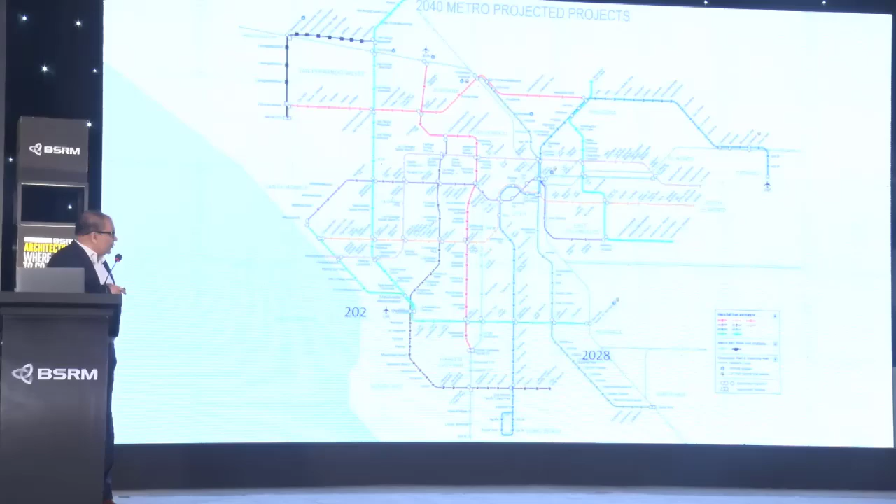Today, the transit network in LA is much smaller. It looks something like this. But over the next 20 years or so, it's going to expand to something like this, what you see here, 2040. And our work has actually involved 2 of these lines.

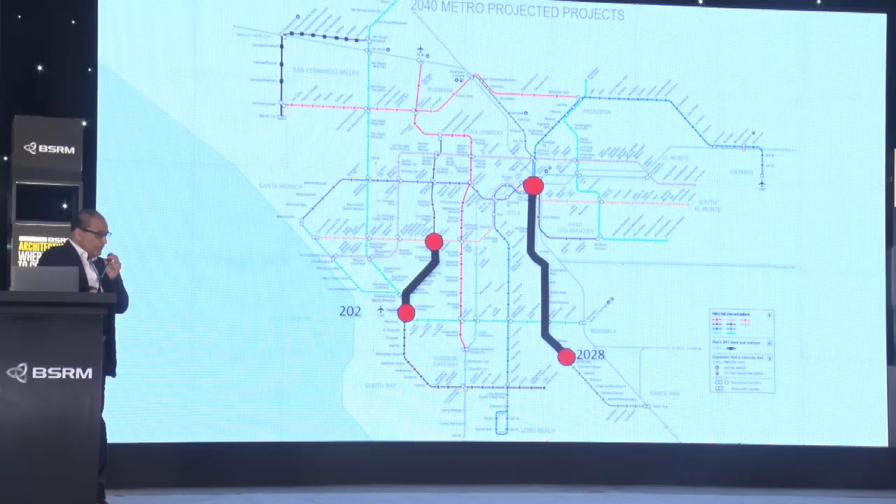One is called the Crenshaw line, which has now been implemented. In fact, the last station is opening next week. And then another line, which is still not being built, but will be built by the year 2028. It is called the West Santa Ana branch.

I would like to talk about these in the context of what I think of as being city design. I think of city design as being a choreography of incremental site-specific urban interventions, which is designed to restructure the immediate vicinity of those interventions, very much like Rafiq did in Old Dhaka with that park, which has had this incredible impact throughout the community and so on.

And so City Design Studio was formed. We are now in our 15th year, focused on making these urban interventions, not only in LA, but in different parts of the world. We think of city design as transforming communities, but transforming communities together with the community.

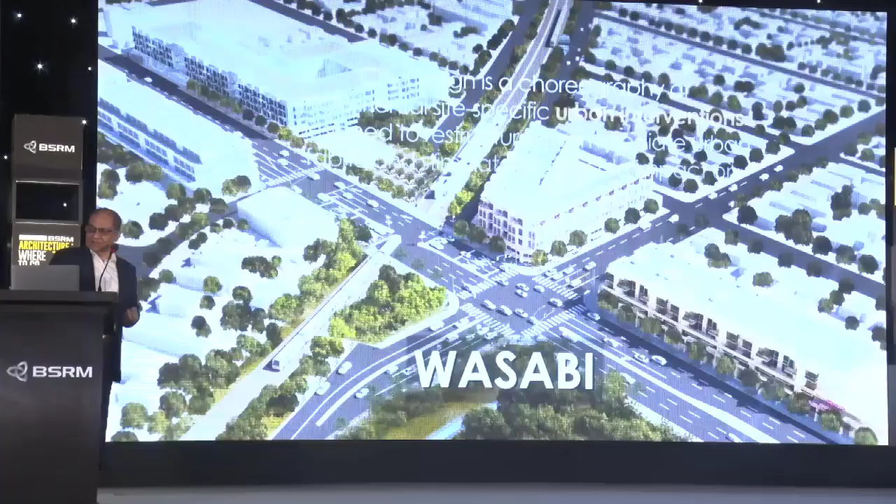So I'll begin by talking about the West Santa Ana branch transit corridor, transit-oriented development, strategic implementation plan, which nobody wanted to say. We instead started calling it Wasabi, which everyone can say.

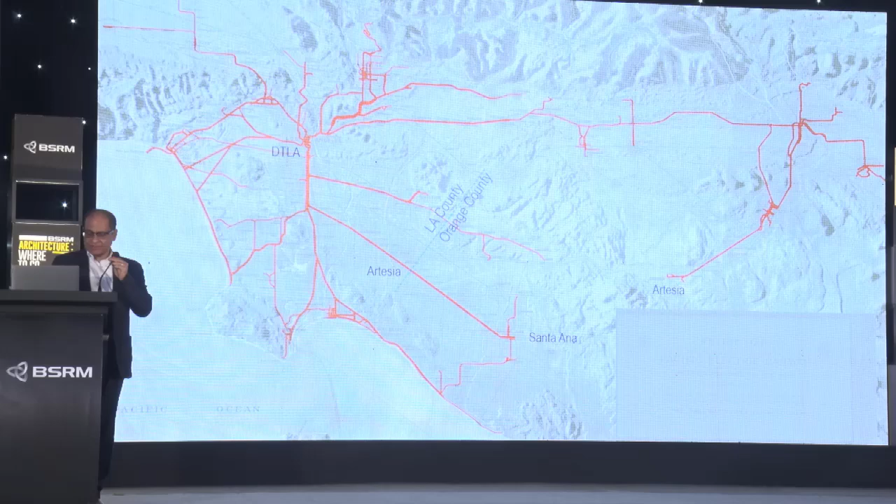And what Wasabi did—this is the red line network, a simplified version of it—which began in downtown Los Angeles at the top and went all the way down to Artesia at the bottom. In fact, it went all the way to Santa Ana.

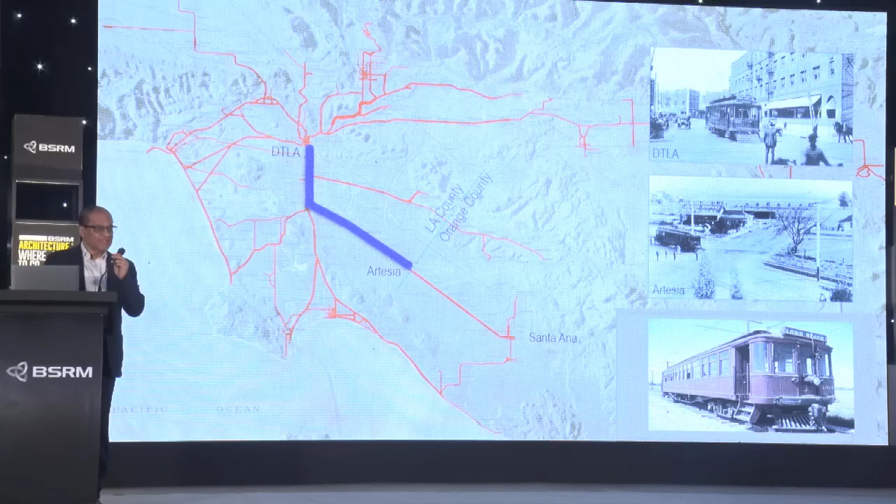Our client was the Federal Transit Administration, and they funded the preparation of joint development studies and transit-oriented development plans for 12 stations along the purple segment of the line, the West Santa Ana line, the Wasabi line.

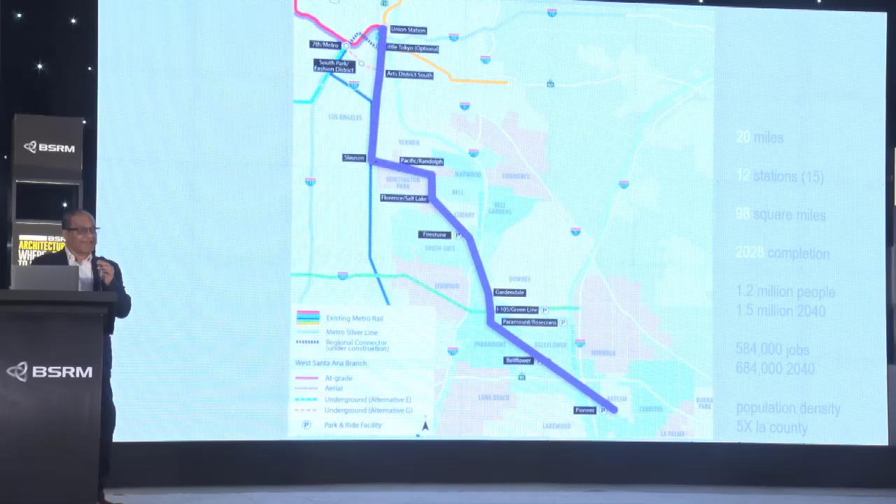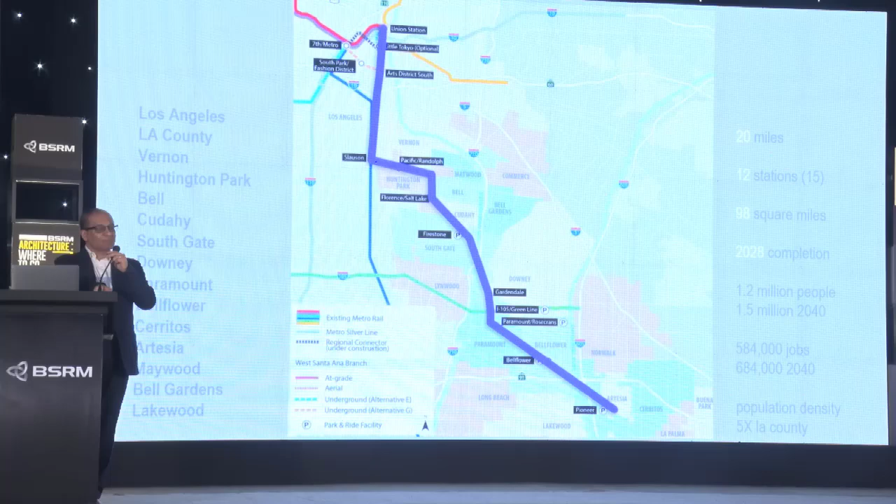Our work involved 20 miles of transit corridor, 12 stations, a 98 square mile impact area. We went through 15 different jurisdictions from Los Angeles all the way down to Lakewood. You see the city of Downey in the middle—Downey is where Karen and Richard Carpenter grew up and sang those incredible songs you all know.

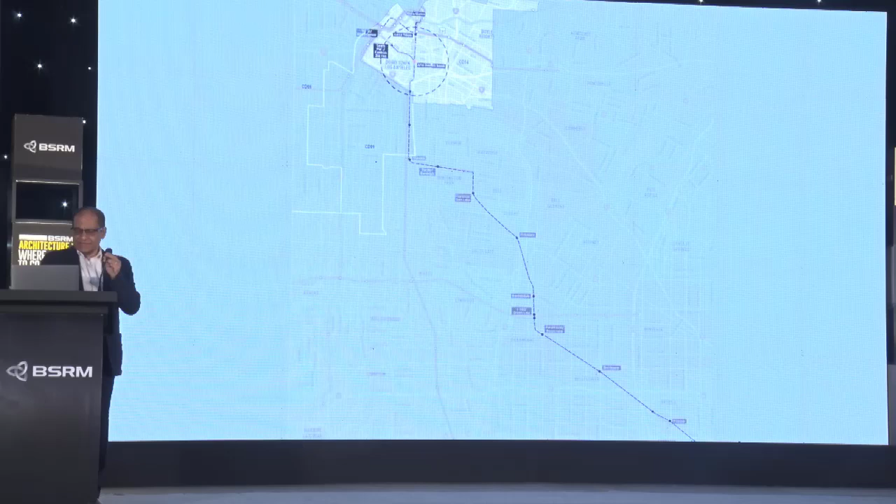And we prepared 12 of these station area plans, or transit-oriented development plans. Our project was one of 28 projects to be completed by 2028, part of an agreement between Los Angeles County and the City of Los Angeles in preparation for the Olympics.

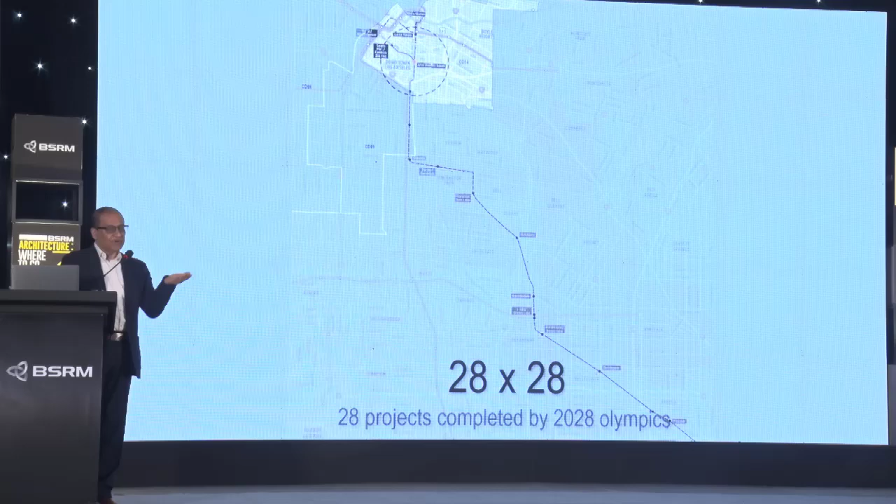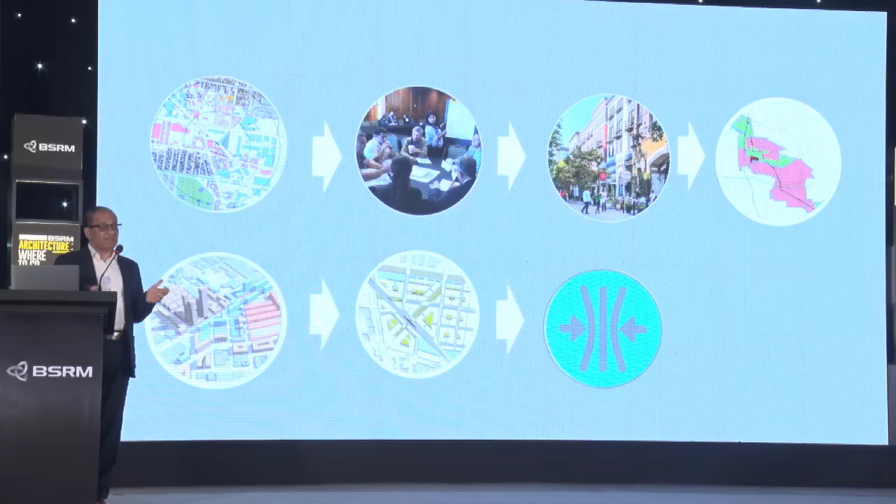So the way we began the plans was by first looking at existing planning studies, speaking with the community and learning from them, preparing a vision based on what the community wanted, looking at the economic viability of those plans, having a concept, preparing the actual plan, and then development strategies and a toolkit.

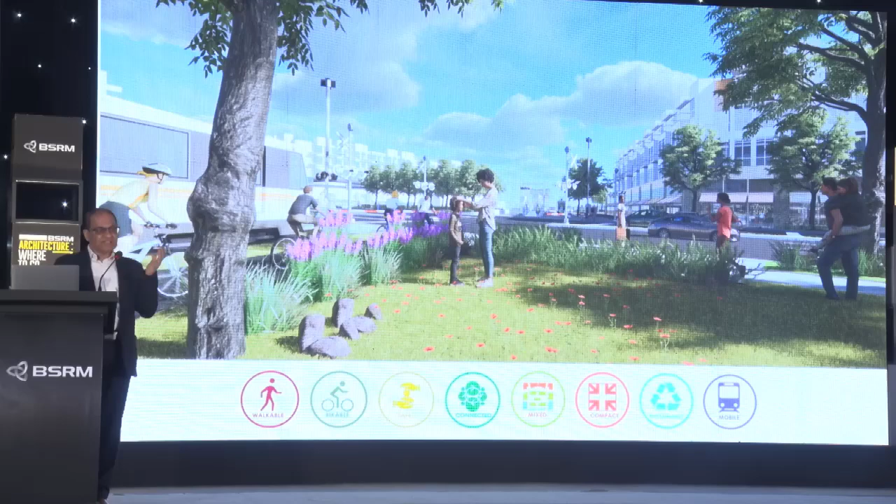All of this was based on a vision prepared in conjunction with the community. I won't go into all the details, but we synthesized them into 8 principles: walkable, bikeable, safe, connected, dense, mixed use, compact, and integrating transit.

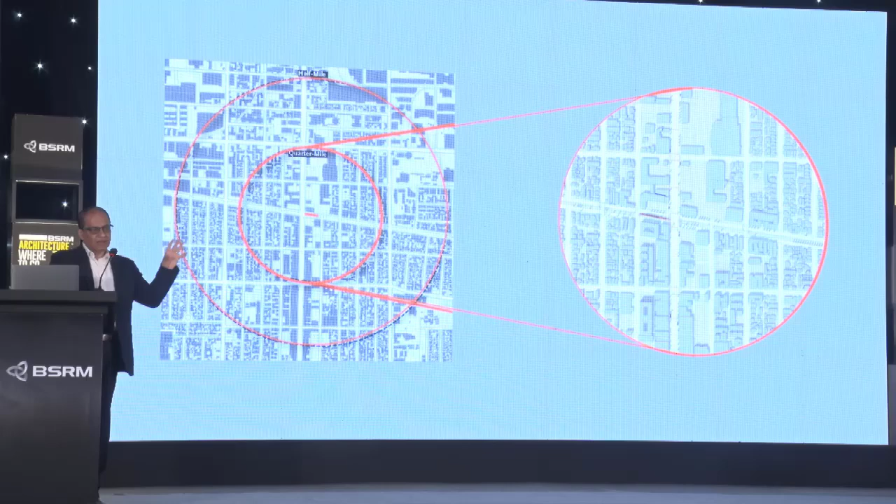Essentially what we did was look at a half-mile radius on the outside and a quarter-mile radius on the inside. The half-mile radius is about 502 acres, so we studied those 502 acres and then came up with a plan for the smaller quarter-mile section.

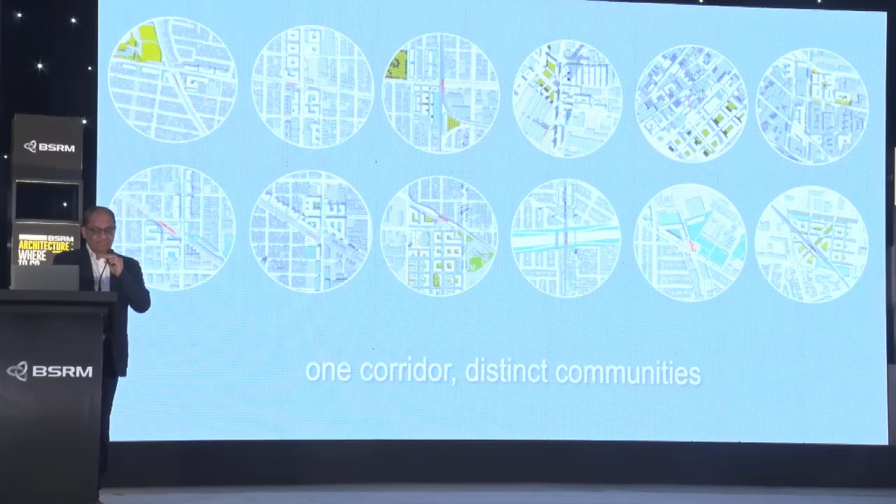The idea, of course, was not to prepare the same plan for every community. Every community is distinct—so it's one corridor that works as an economic unity, but with distinct communities. So 12 plans with 12 separate identities. These plans looked at how the investment of transit infrastructure would impact development.

When the plan was finally prepared, it had the consensus of the community, was economically viable, and integrated transit with it. What you see as number 2 are two towers by Herzog and de Meuron, which are part of this effort.

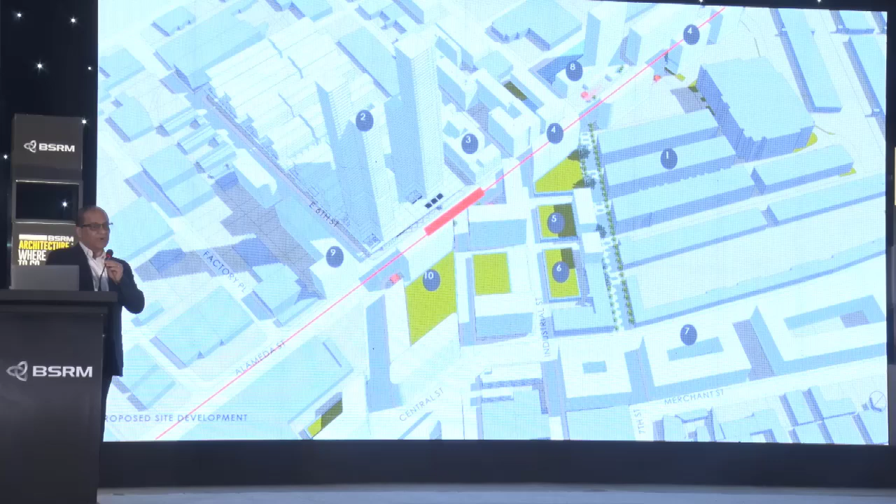Part of engaging the community also had to do with looking at what existed, but also what was possible based on the viability of that community. So whereas you have very high density, walkable, mixed use close to downtown, it's not quite the same elsewhere.

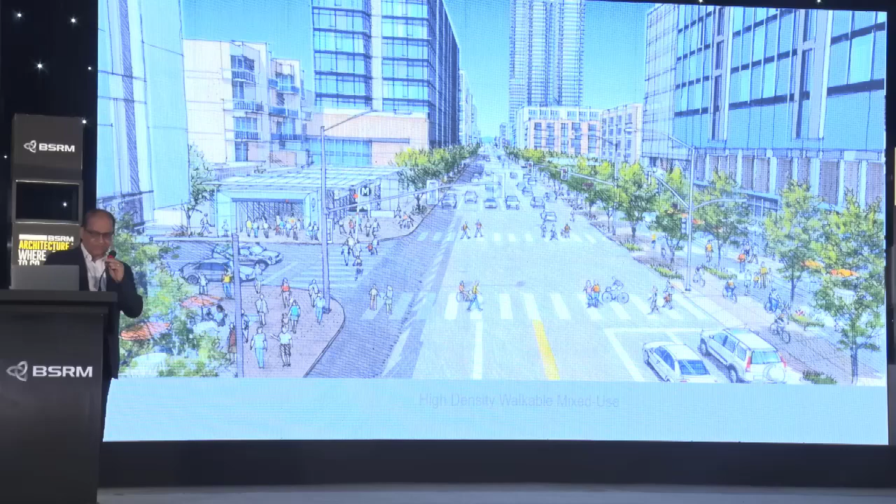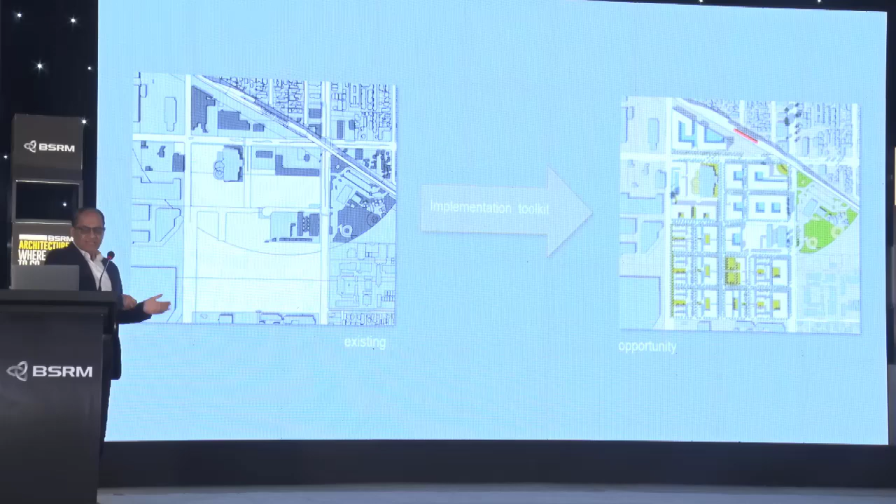So we had to prepare an implementation toolkit that took the area from what it existed as to what it could become. This toolkit was comprised of different strategies—developing density, mixed use, and so on.

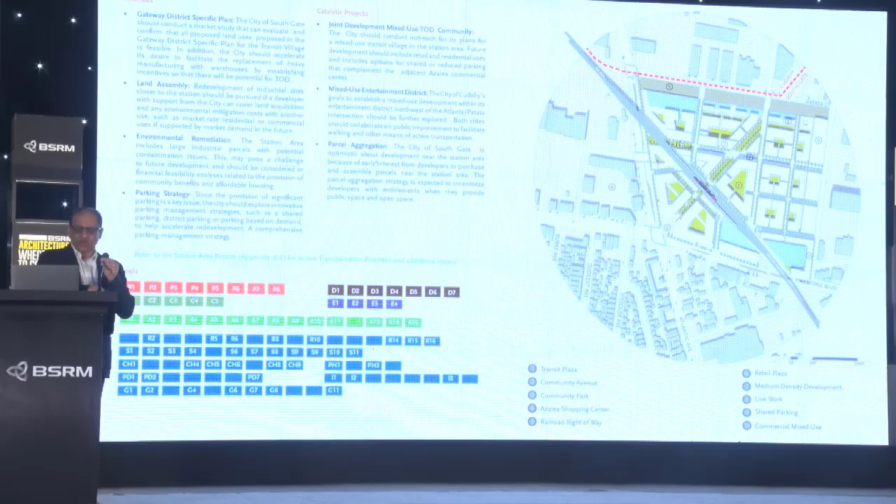Each of these station areas had a toolkit prepared that each community could integrate in order to come up with very specific development.

We proposed these 5 development typologies, which have now been implemented as part of the Federal Transit Administration's pilot program for TODs throughout the country.

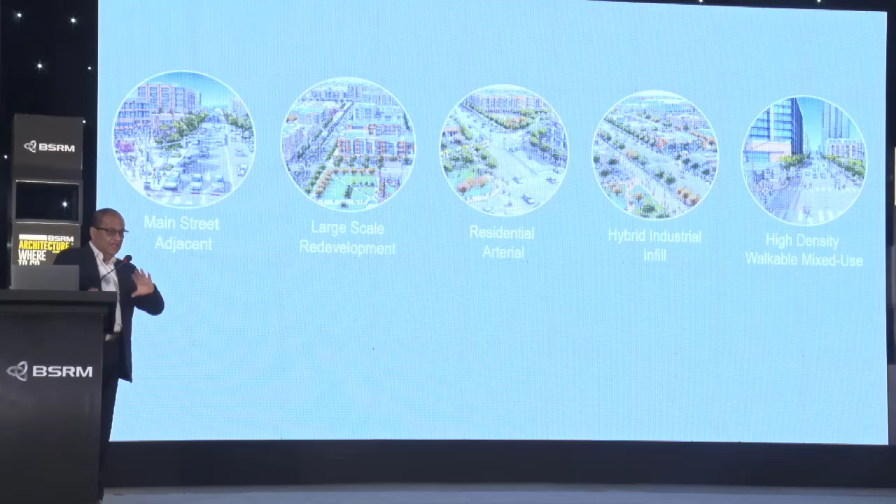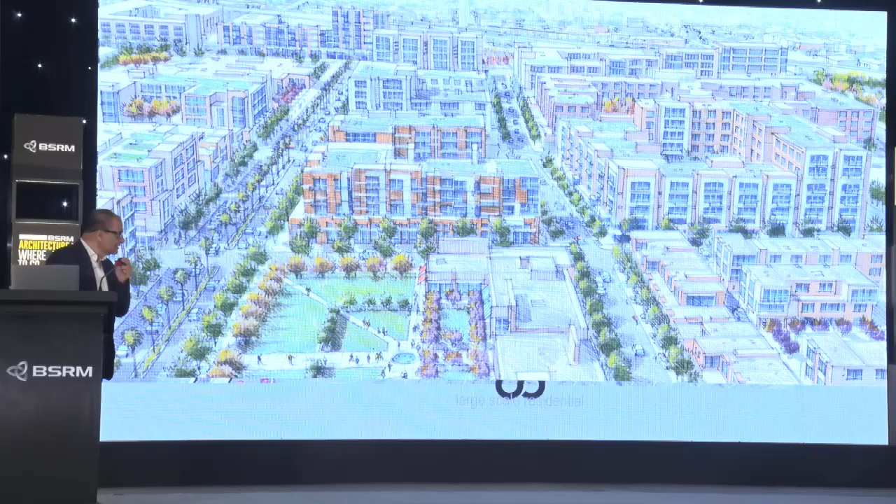I'll just go through a couple of these. In the interest of time, I'm going to move along very quickly.

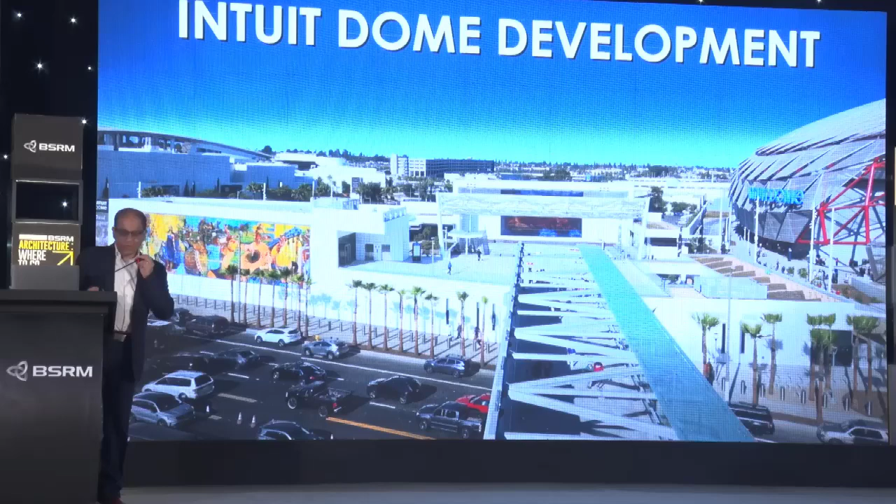I want to go on to another project, called the Intuit Dome Plaza development. Our client—I don't know if some of you know him—his name is Steve Ballmer. He was the CEO of Microsoft after Bill Gates. He's also either the 6th, 7th, or 8th richest man in the world.

A very passionate human being who loves basketball. If you ever watch a YouTube of him at a basketball game, I'd imagine you'd end up spending most of your time looking at him rather than at the basketball. He was a phenomenal client.

But all three of these facilities are going to become part of the 2028 Olympics.

Steve wanted us to create an urban oasis, themed as basketball. We had a fairly regular sized piece of land adjacent to the Intuit Dome. We did not design the Intuit Dome itself, but everything else you see around it—the parking structures, bridges, various buildings—all of that is our work.

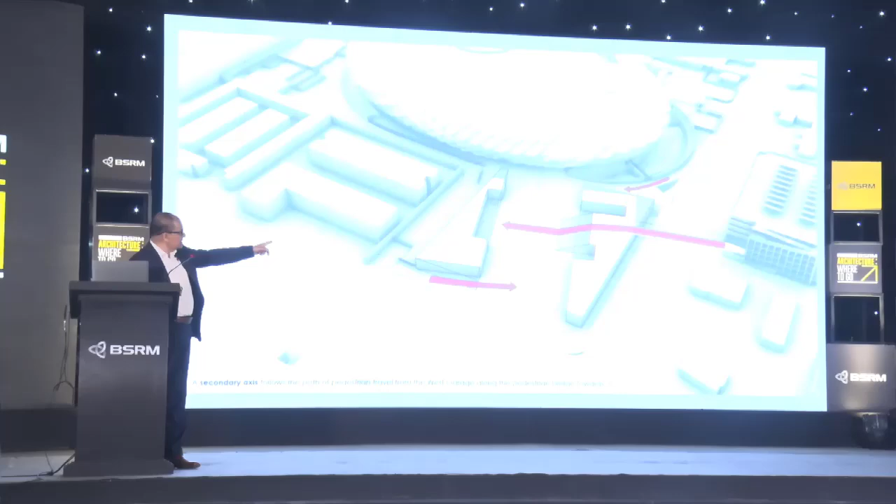We looked at three specific directions. One is from Century Boulevard, the street running east-west. The other is from the parking structure coming down. We conceived of this as a whole experience—walking along a bridge and coming down onto a built form that captured the movement, which is a band shell with a 70-foot by 40-foot LED screen, which you'll see in a minute.

Because of the geometry of the site and the movement of people, each of these buildings is very different. We had a ribbon, a datum at 18 feet—I'm speaking in imperial dimensions, which is what we use in the US, unlike the rest of the world—that ties all of these pieces together, wrapping around the band shell, which is a different height altogether, but it's one continuous ribbon.

We integrated a program including a basketball court next to the band shell, and what we began calling the Roman steps, now called the Clipper steps. All of those began to have programs. In blue you have the team store, the Clipper store. The flesh-colored ones are restaurants and bars, and the bridges are purple.

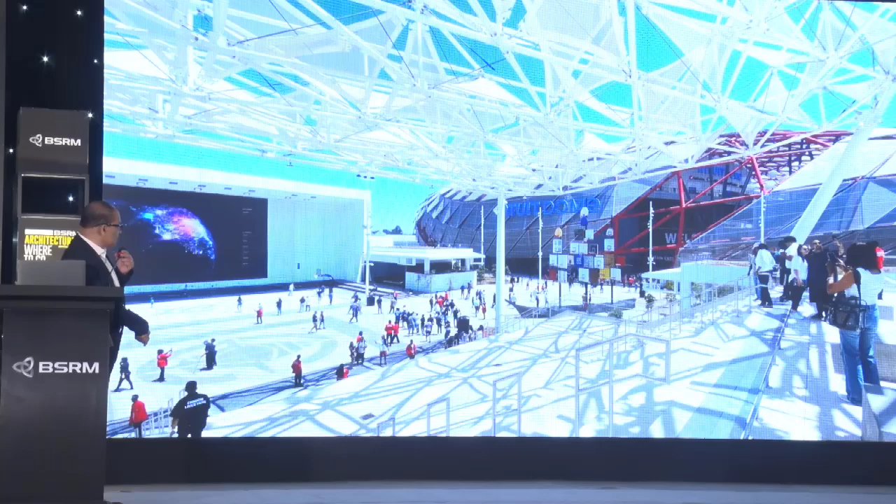It opened about 6 months ago. What you see on the screen is the incredible work of Refik Anadol, who converts data into art.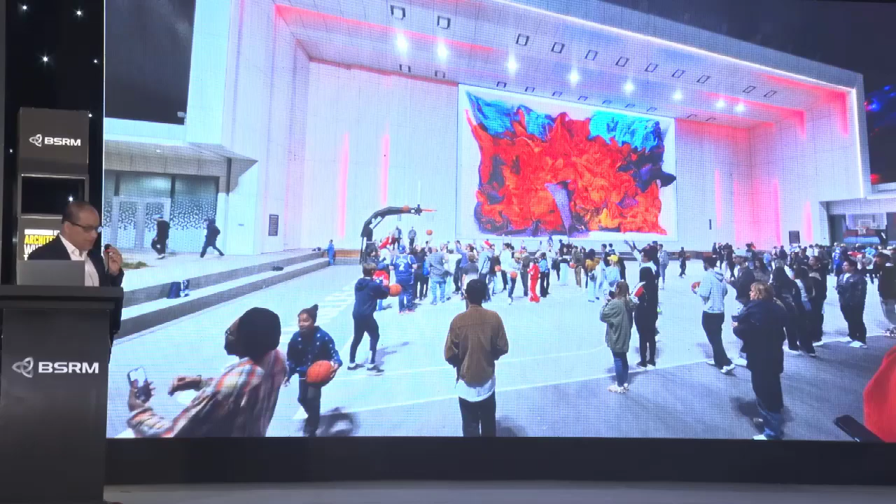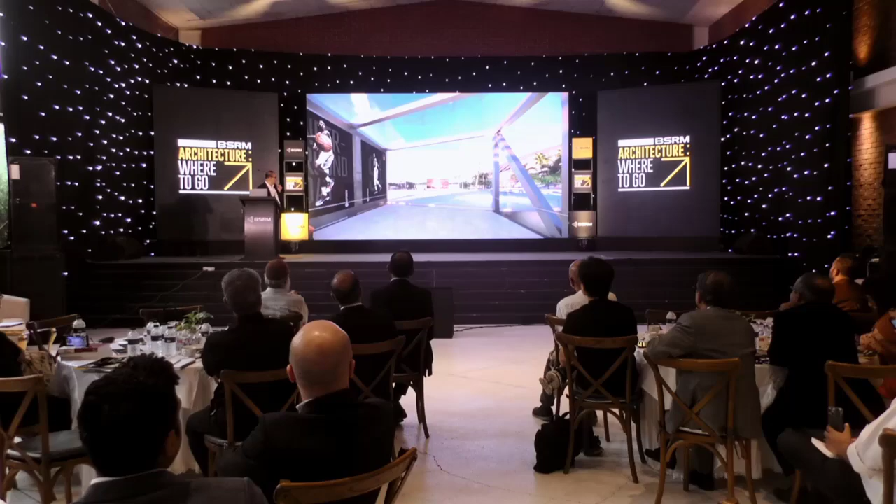Again, a daytime shot of the band shell. This was how we conceived of the whole journey—coming over the bridge, coming down the steps. Part of it is a place where people can sit, part of it you step down. These are the stairs to the right, and there's an escalator all the way to the left.

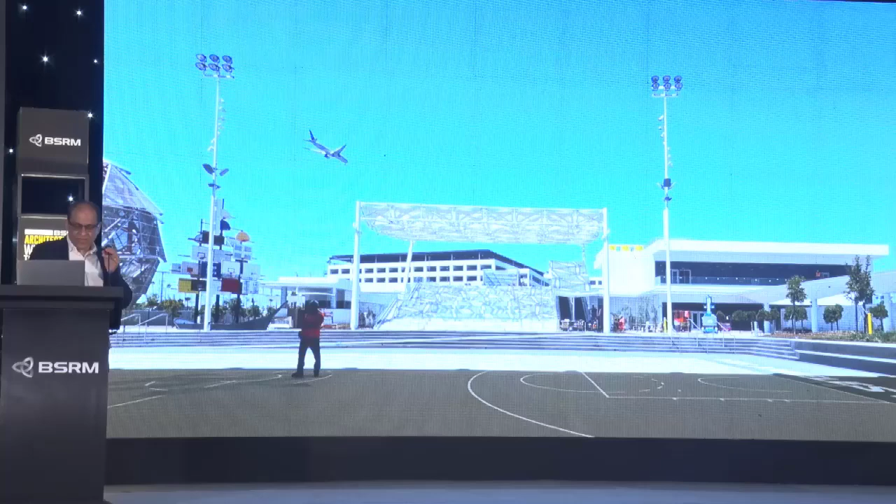The band shell has changed, as you can see—it was conceived one way here, and it's different later on. This is what the steps and the pergola look like right now.

The ribbon wraps around all the various buildings, the flagship and so on—great public art.

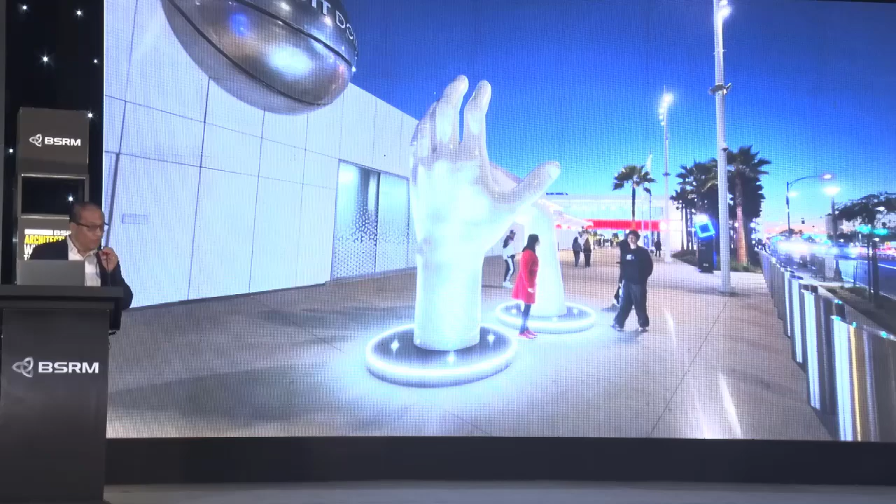This is what it looks like at nighttime if you're up in the sky in a drone or a helicopter. This is what it feels like in real life.

The next project I want to share very quickly is the Grand Panorama—it'll become really apparent why I'm calling it that. One of the most extraordinary things about Los Angeles is this incredibly benign, wonderful climate.

Anyone who's an architect has heard of the case study houses. This is Pierre Koenig's house, case study number 22, about this idyllic life on the hills, looking down on the city, with a wonderful swimming pool. We looked at how we might make this available to more people in a very dense environment.

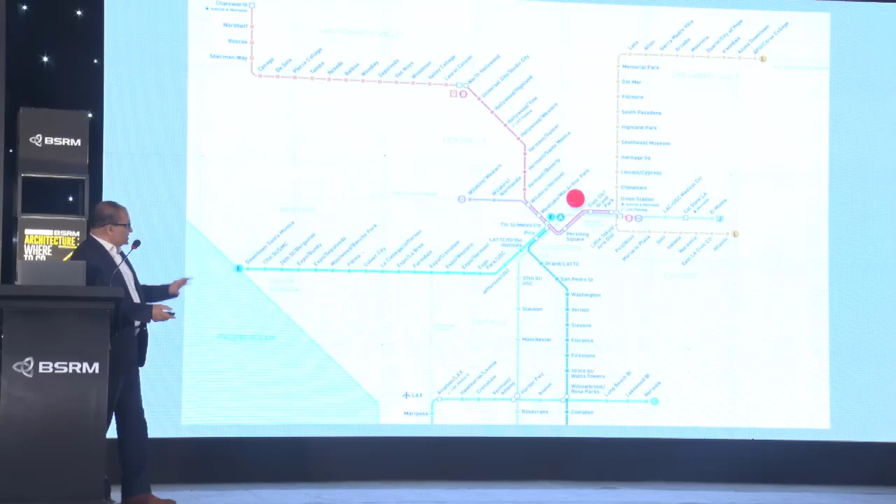I was at BRAC University this morning—extraordinary work you've done, a very dense urban university, unique and extraordinary. So we tried to see if we could do the same in the heart of Los Angeles. Our site was at the center of many of these transit lines.

You can see the development. You see the yellow line, which is the transit line here. What you can see, I'm going to walk away from the microphone, but you'll see Frank Gehry's Disney Hall. There's Diller Scofidio's Broad Museum. There's Arata Isozaki's Museum of Contemporary Art. And then there's I.M. Pei's Towers, and I'm going to just walk over and point to them.

So if we look in one direction, looking south, there are these incredible commercial office towers. And if we look the other way, there are slightly lower residential buildings.

We had a very complicated site owned by 3 separate owners. Enwave is a Canadian private utility company providing district cooling. The metro site is owned by Metro, LA Metro. And the part that says VAC is owned by the city but vacated street. And the interesting thing is that if you want to do any private development here, you have to have some agreement with Enwave, but then you get to lease all of the land, which means that you can only rent, you cannot buy.

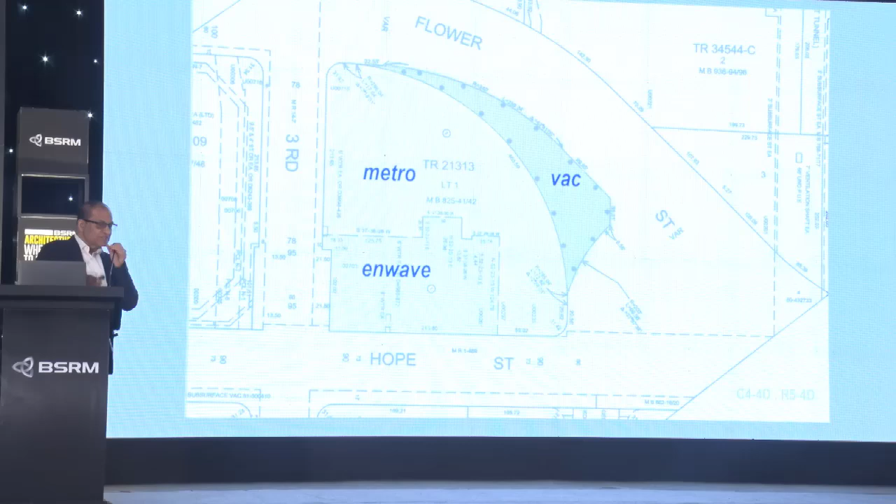And because it's publicly held land, you have to have some level of affordability, so 22% of the units are affordable. And this is how we did that. So the site, very interesting site, very odd shape, about a 50-foot difference between Hope Street, which is to the left, and Flower Street, which is to the right here, on either side.

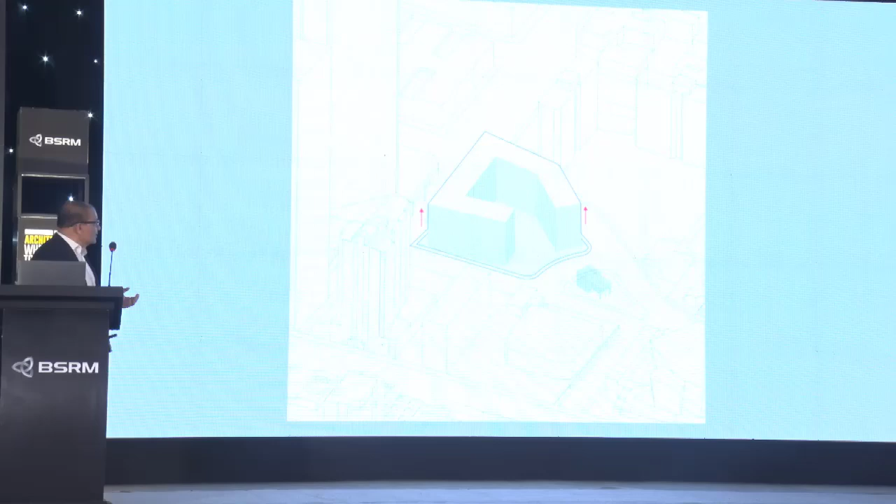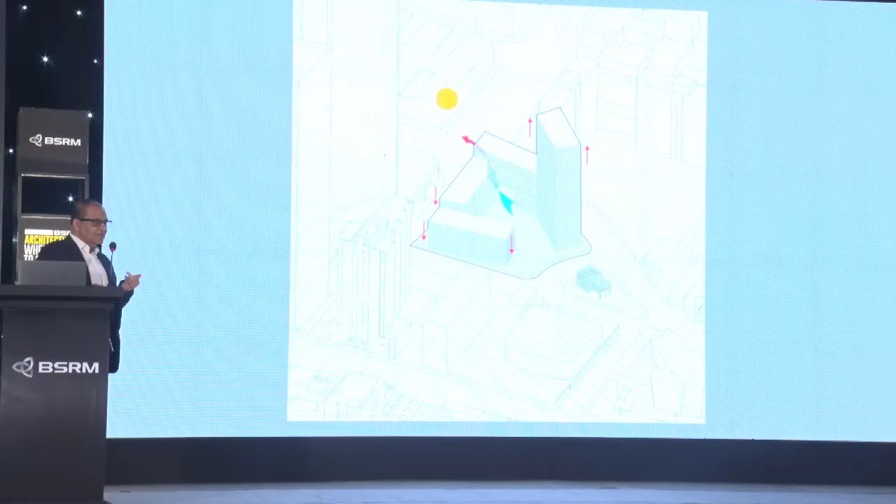Because of the metro box, there's a whole portion of the site that we could not build on, and essentially what you see as the footprint, the white footprint, is where we could build. And so we took a portion of that, we extruded it as a uniform extrusion, if you will, and then based on the direction of the sun, the wind, the views, we articulated the massing.

And then, of course, we broke it down to different levels. The plates, the floor plates, then began to articulate the plates in different ways. And this is essentially what it looks like. So the portion that is blue, those are more modular floor plates, and I'll share with you how these are just a few plates, if you will. There are actually, I think, 4 different plates which sort of sit on one another and make it look very whimsical. Each of these is terraced down, so you have the same swimming pool that Pierre Koenig's house had, but now it's available to everybody. And then the yellow portion to the right is much more customized, and the rents are higher. So the customized units pay for the more modular, affordable units lower below.

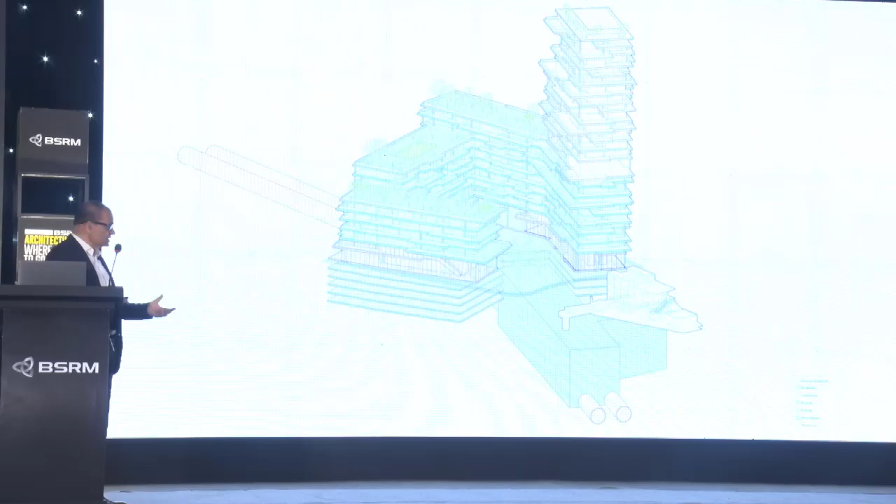The pink shape, the flesh-colored tone, is commercial, galleries, and so on. And what you see in gray down at the bottom is the actual station, the station box. And then what you see in yellow are the tubes along which the transit lines move. So these are plates that kind of alternate, the floor plates, and when you put them one over the other, it creates this whimsy for the buildings.

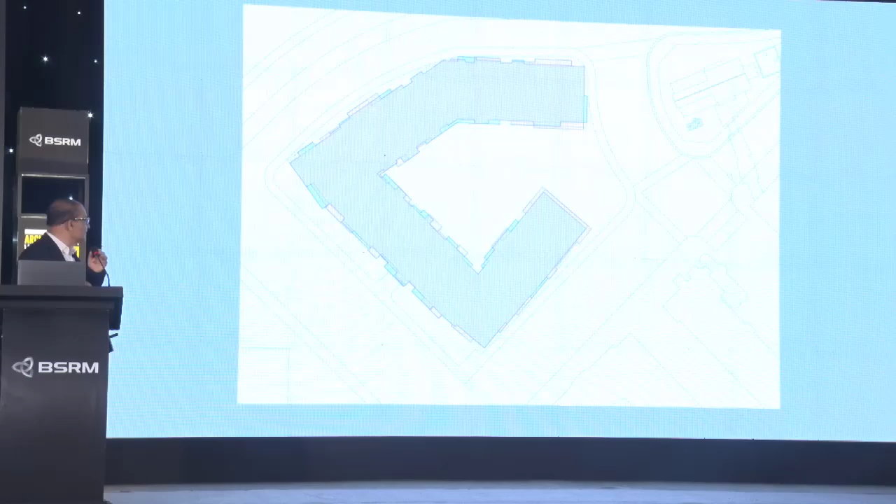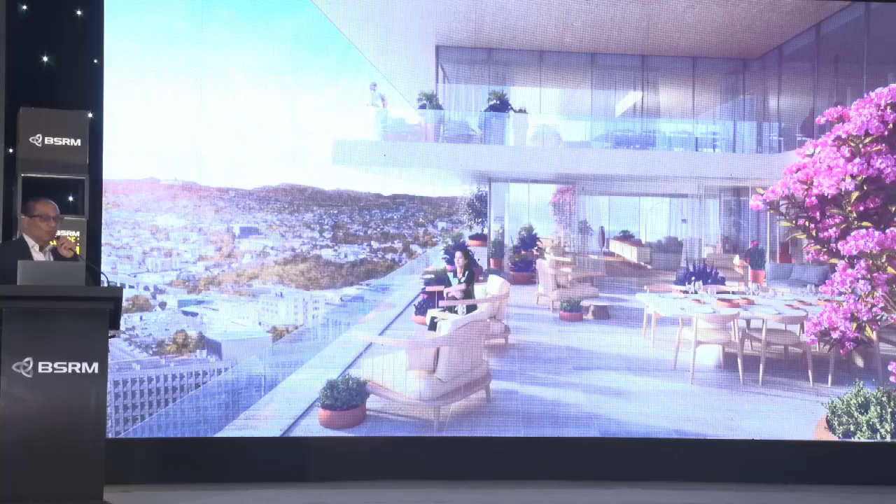This is what the site looks like. It's a view from the metro station. Wonderful lifestyle, at least in the renderings. And then this lifestyle of living up in the sky.

As you can see, it's a fairly regular floor plan. It's a double-loaded corridor that wraps around the site. And then the footprints get smaller and smaller and much more customized as you go up. And what you see here is the station box and the tunnels, but a very regular parking layout. I'll share a little bit more about this parking layout.

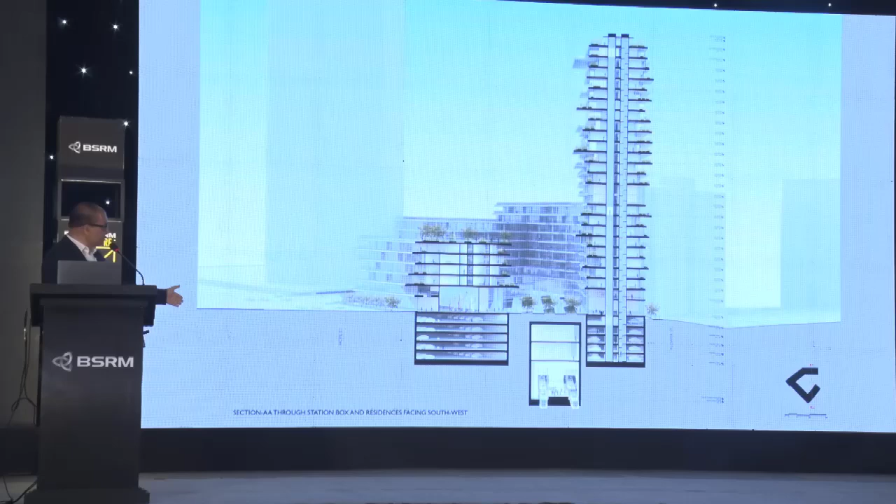So if you've done parking structures, you know you need a ramp between levels, but we have no ramps here. But how did we get to have a parking structure with no ramps? I'll get to that in a minute, but again, this is the station box in the middle where you cannot build, and then the parking structure that wraps around the station box, and then the section through the tower. Okay, 5 minutes? Oh my God, I'm just going to go very quickly.

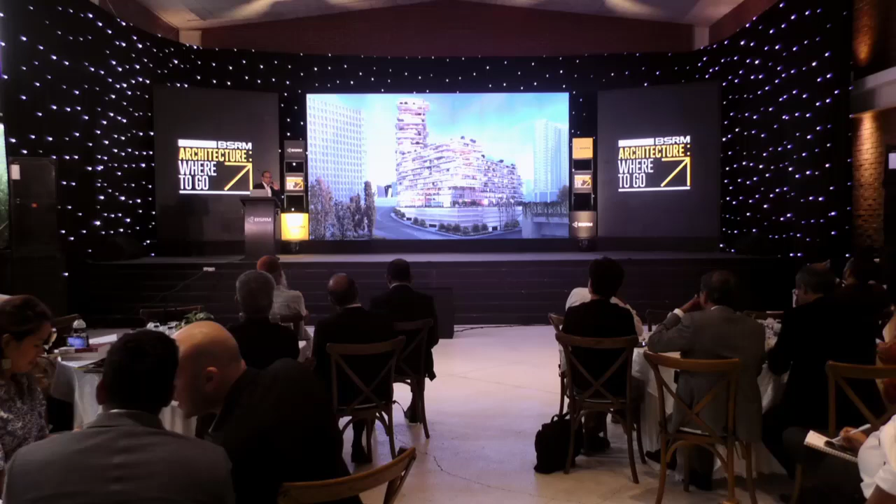So they're big pilotis on a raft foundation, which keeps this project here. And the way the parking works is because of this 50-foot difference between different levels, you enter the parking structure at different levels, and the result of that is, one, you have a less expensive parking structure, but two, as the parking demand is lowered, you can convert them to other uses. Because obviously you cannot build on a sloping floor plate, but you can convert if it's a flat plate.

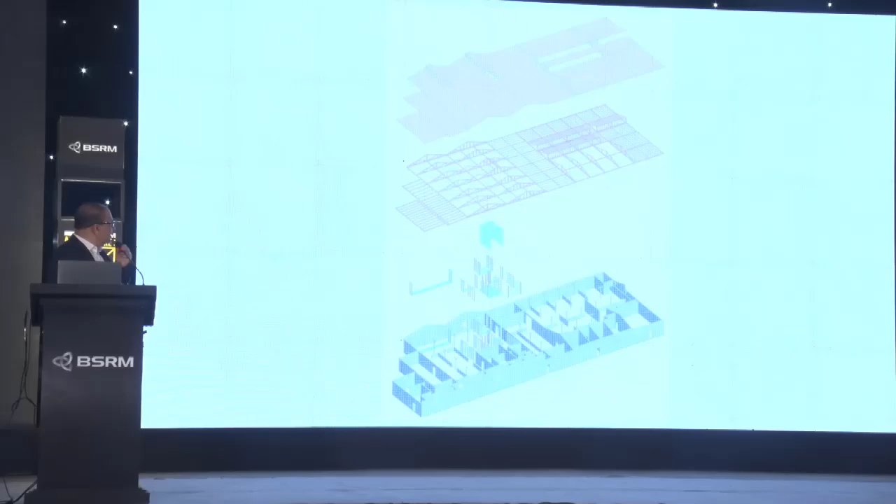I'll just go through this very quickly.

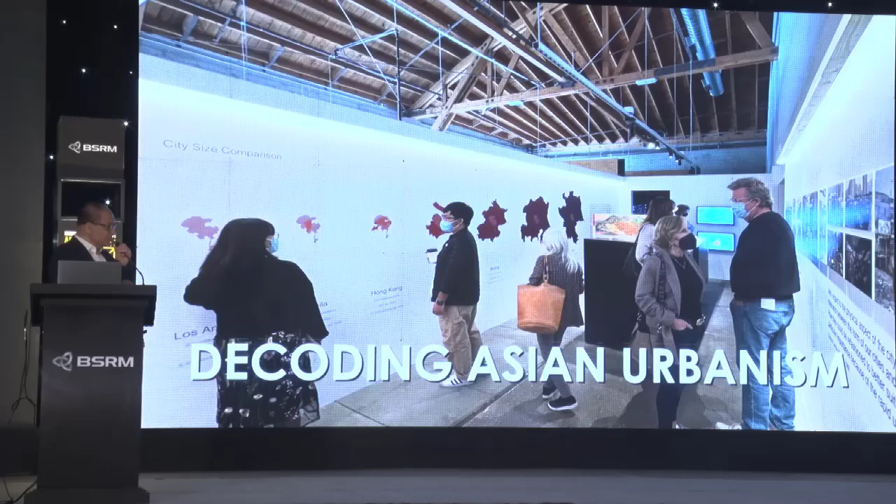This was the exhibition Decoding Asian Urbanism. One of my colleagues—we had an existing gallery space, a lighting gallery for a lighting manufacturer, and the owner told us we could not remove these existing exhibit modules. It became this exhibition that you see here, which we designed in a slightly different way.

We designed it cinematically. We had on our team someone who was a filmmaker, and she asked us: what is the experience you want people to have when they arrive, which is provocation and intrigue, and what do you want people to leave with? That kind of guided the whole design of the exhibition.

So we had a sequence: provocation, immersion, curiosity, serenity, inquiry, discovery, and then an Instagram moment. We had to figure out a way to place this linear experience within a very different geometry. So we created this experience, and we asked permission to remove a couple of pieces which we could not break. This essentially became the floor plan for the exhibition.

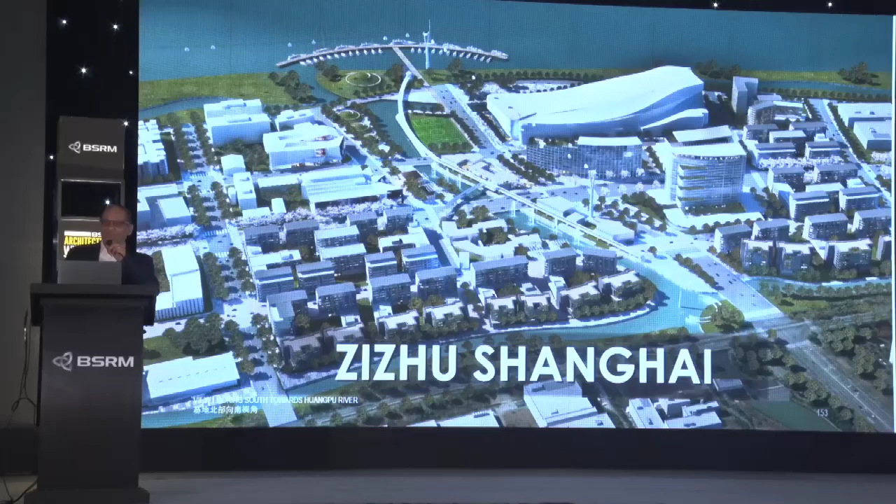I think I have to stop there, right? I was going to speak about this issue, but I'll stop there. Another two minutes? Okay, another two minutes.

So this is a project in Shanghai. To give you some orientation, what you see zigzagging here is the Huangpu River. It originates at the Bund in downtown Shanghai, where you have those extraordinary towers, and for reasons not clear to me, it does a 90-degree turn.

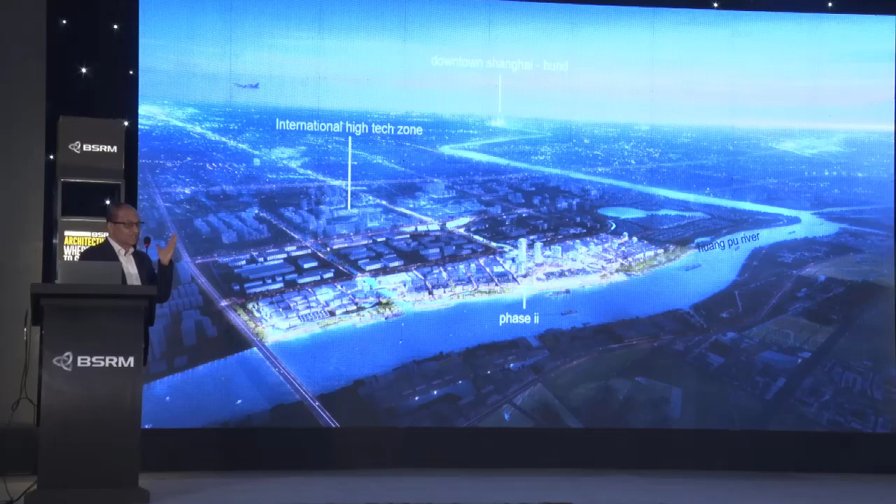Our site is what you see here as phase 2. It is adjacent to the International High-Tech Zone, home to Intel, Microsoft, Coca-Cola—the China homes of these companies—and the overseas homes of many American universities, including USC and so on.

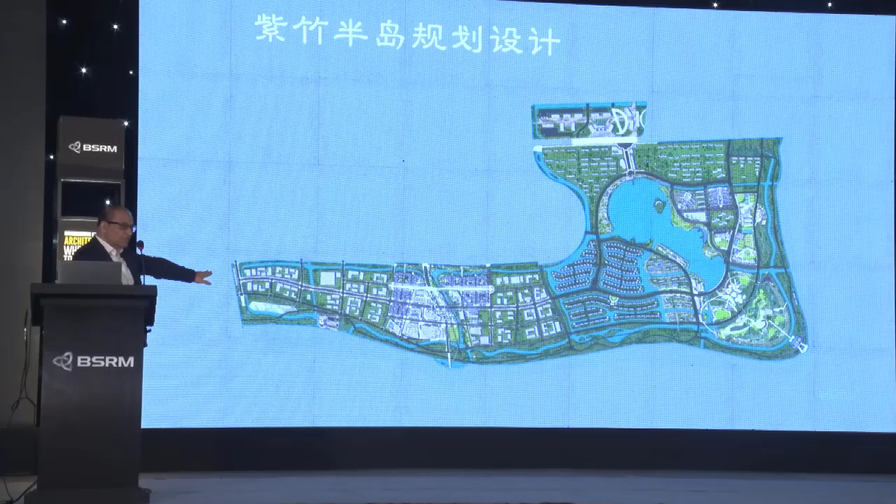So what we had was this site. This is a big development. Our portion of the site was the part you see, which has a lot of the denser buildings. And this is the master plan we prepared.

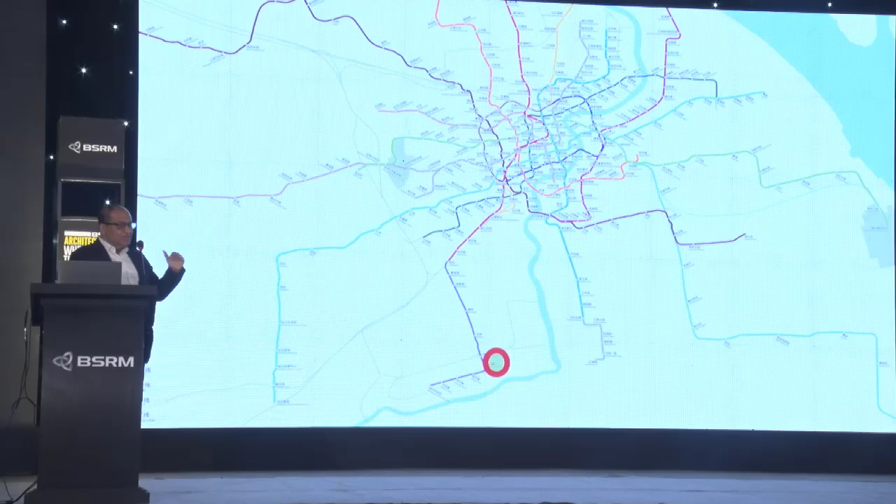This site is at the terminus of one of the major transit lines from the Bund down to the southern portion of Shanghai, which was originally agricultural land. So we had to ask ourselves: how do we bring this nature back into a very dense urban environment?

We walked around the agricultural site—this is my colleague Peter Fink from London, a lighting designer—and the developer, Mr. Shen, wanted tall towers to represent development. We said, you cannot do tall towers here. This was a place, a community for young people, and you had to create a place that would be attractive to young people.

So we were inspired by Xintiandi in Shanghai, where you have the traditional courtyard homes. Although we could not recreate the homes, we could emulate their principles, which was to create courtyards where people could filter through the project.

So we developed this master plan with courtyards, and then you see these green strips which allow people to move through the courtyards and connect back to the waterfront, and to the extension of the waterfront as it goes through the site.

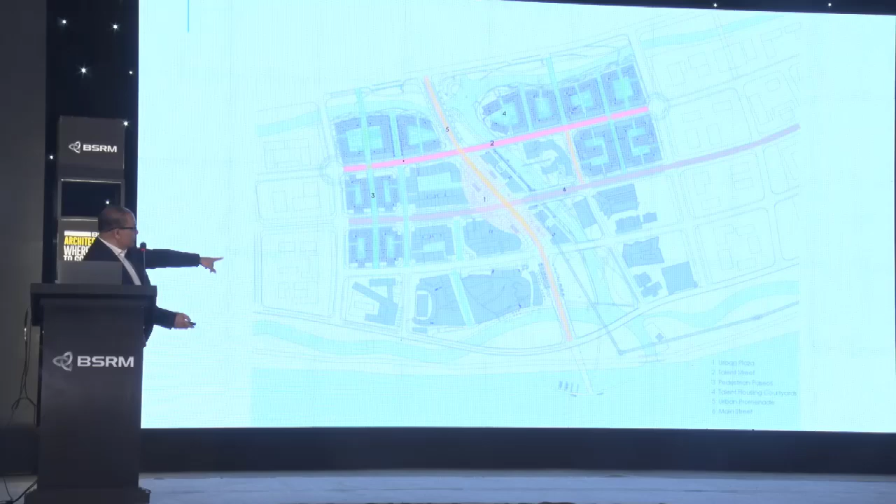I can tell you that we designed everything here except what you see as this big blob to the south, which was designed by Gensler—number 5—so we have no part in that. Everything else is us.

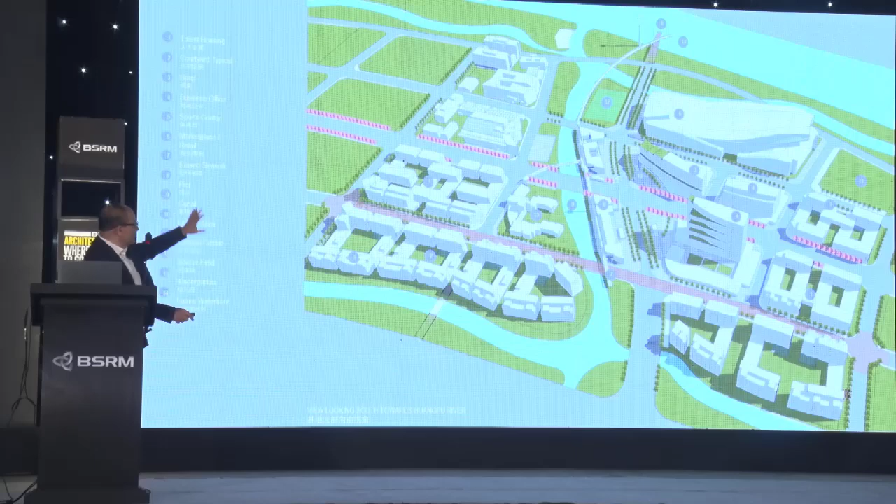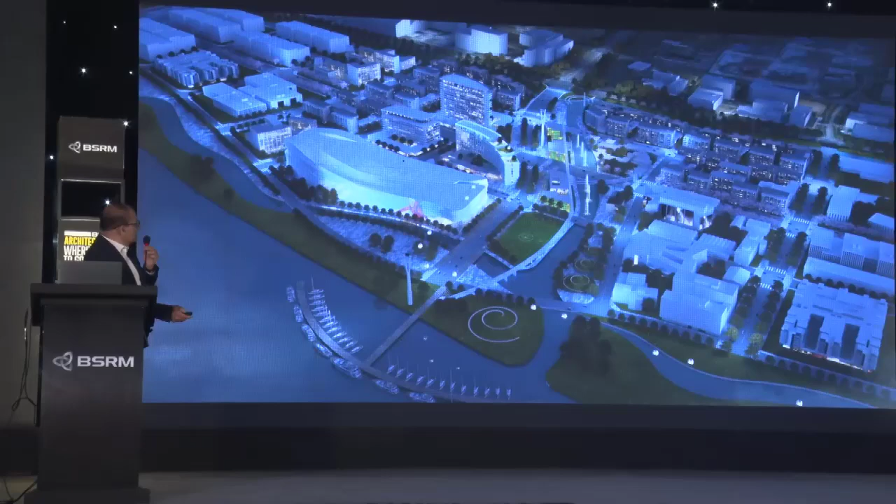And this is the environment we wanted to create. We wanted to take those tall towers and lay them flat on the ground. This is a nighttime version of that project, and various scenes.

And I can speak more to the projects when we are in discussion. Yeah, thank you very much.